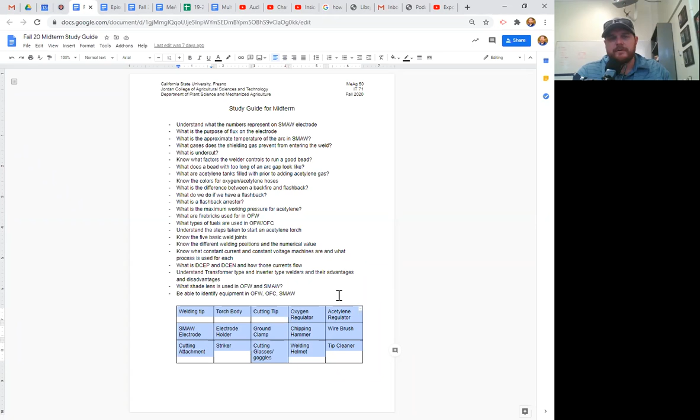It'll be posted by Thursday. You don't necessarily have to take it by Thursday, I'll have it open for a week. You're not going to see your answers and all that kind of stuff, you'll see kind of a score. That way, since people will be taking it at different times — you might take it Thursday, somebody might take it Saturday or Monday of next week, I don't really care when you take it — but because everybody's taking it at different times, you won't see your answers for your questions, but you'll see your results. It'll all be on Canvas. There's not going to be any lockdown browsers, there's not going to be any of that.

We were actually told that we can't use that, or at least that's what I heard from somebody, but in either case I don't use it anyway. The one thing you are going to have on that midterm is a time limit, so you'll have an hour to complete it. So once you start the midterm, you can't just leave it open and try to search for all the answers and that kind of stuff. That being said, I can't stop you from pulling up a PowerPoint that I put up, so that way you have it there and you can look for it.

With the time limit, there should be enough time for you to answer those questions. I've never had anybody go over that time for this. There's no number equations or stuff like that you have to do. It's all pretty straightforward, stuff we've covered in the PowerPoints. Some of the things like the tools and stuff is what we've seen in the lab, stuff like we have here.

I'm not going to stop you if you have that. I have no way of telling, but I'm not telling you to not do it, and I'm not telling you to do it either. It's up to you. The best thing for you...

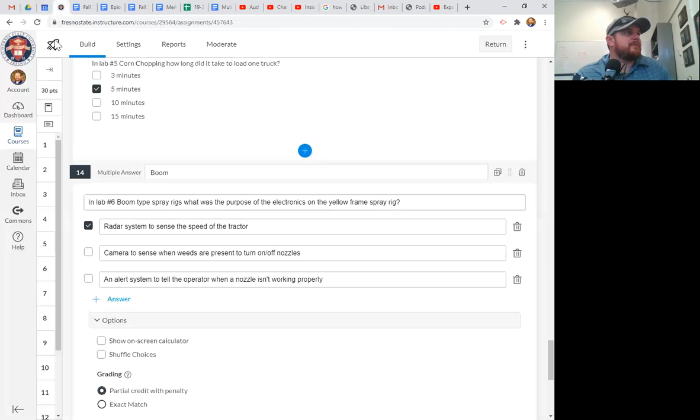Maybe if I pulled up this thing. Oh, did I save that? I don't know if I saved that. If you just look through these things, if you look through Canvas, can you guys see Canvas? Can you see my Canvas page? Is it sharing that screen? Or do you still see the... Yeah, it's sharing. Yeah, we see it. I don't know how this works sometimes.

I don't think the introduction, we don't really have anything there. There's probably going to be some equipment questions in there, like safety questions. I think I kind of put that in that syllabus. So if you go through the personal protective equipment PowerPoint, that stuff's going to be there. If you really look, take this study guide, there's questions on the study guide, but you don't have to answer the questions. They're just more kind of questions so that you know how to answer them. But if you look at those questions and find the answers in these things, I don't think there's anything in that one. The PowerPoints are probably the biggest thing for you to look at.

And just make sure you guys know the tools, welding joints and positions, knowing those things, knowing the number classifications on the electrodes. So like a 6011, a 7018, I may throw in a different rod that we haven't used, and that's okay. But understanding, for instance, if it's a 4-digit number, what are the first two digits on a welding rod? What do they represent? Do you guys know? Do you remember?

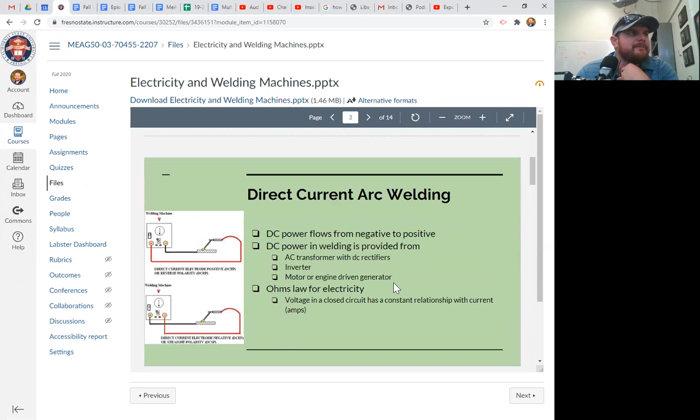Do we remember that? Is it from positive to negative? So electricity, okay, you guys can see this right here, right? Electricity is going to flow. Let me see, where is it at here? Did I skip it? I did skip it. I don't want to tell you the wrong thing because I could screw it up right now. Electricity flows from negative to positive. And I know I have that in here somewhere. You see how I'm even having trouble trying to find it?

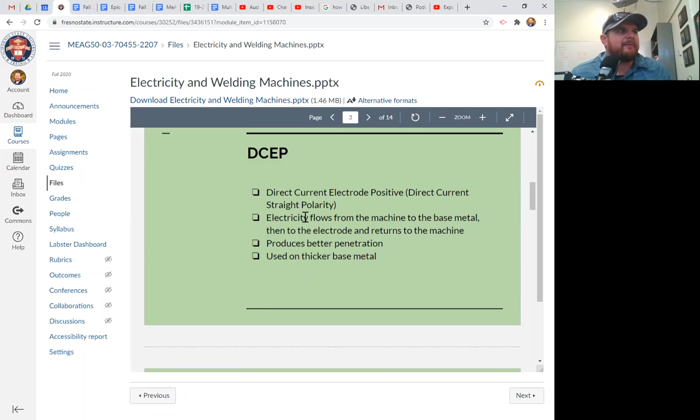Oh, right here. I'm looking right at it. Electricity, okay, that's not what it is, but it's always going to flow from negative to positive. No matter what, it's flowing from negative to positive in a system. And you can see it in this picture right here. This is an example of DC electrode positive. So it's always going to flow from negative to positive. It doesn't matter how I hook up my electrodes from one to the other.

If I were to swap this over and go to DC electrode negative, okay, notice how the power is still flowing. It goes from negative and it flows into positive. Okay, whatever piece of equipment I have and the order that those things are going in, whether it's going negative to the electrode and then to the ground clamp, or whether it's going negative to your ground clamp and then into your electrode, the power is not switching.

Okay, so that's kind of an important thing because some people tend to mess that up and they think on a DC electrode positive, it might be flowing in this direction. On the negative, it's flowing in the opposite direction. We flop the way it's going, and that's not how it works. Okay, electricity is always going to flow from negative to positive. It just happens to do with where in line do we connect our electrode and our ground clamp.

And understand the difference between those. Like, what's the advantage of DC electrode positive? What's the disadvantage of it? Vice versa with the electrode negative. What are the advantages? What are the disadvantages? Okay, I'll let you guys kind of look that stuff up, but that's all in here. But this slide right here, or this PowerPoint, this is typically where people kind of get screwed up because there are a lot of details.

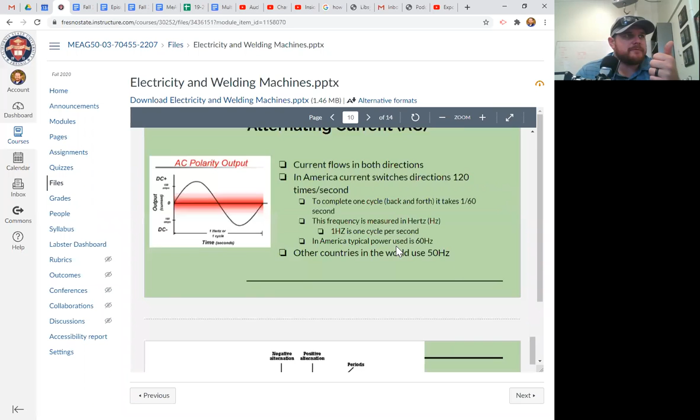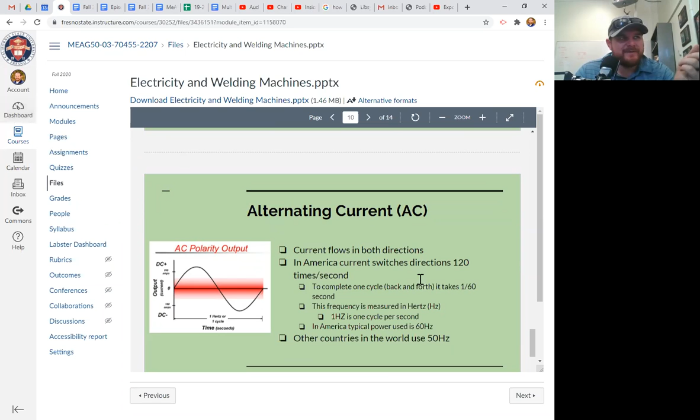Know what an inverter machine is. We talked about it, I think it's right here. I'm probably not going to test you too much on this stuff, on the AC waves and stuff like that. I know we talked about it. We'll kind of talk a little bit more about it as we get into TIG welding because it becomes a little bit more imperative. If you've had me for MEAG 5, you probably have already kind of dealt with some of this stuff when we deal with motors and controls. MEAG 5, MEAG 1, if you have me right now for MEAG 1, we're going to jump into motors, controls, and we'll talk a little bit more about sine waves and stuff. But I'm not going to really, I don't think I'm going to test you on that.

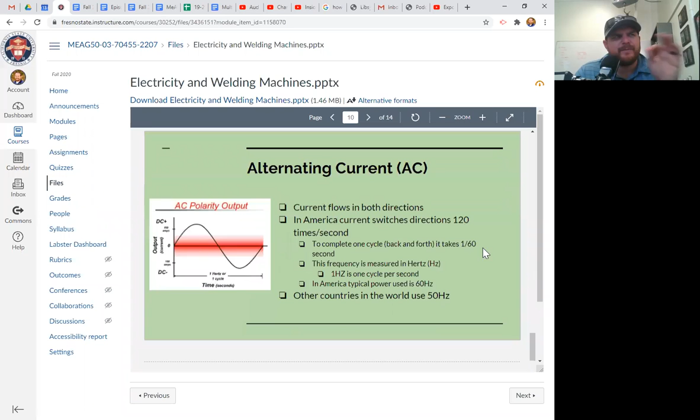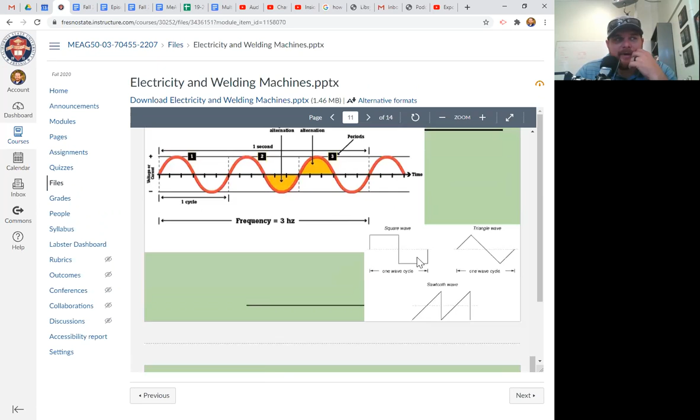Just understand that AC current is both DC positive and negative combined together. And AC power is what we have when you plug into your homes. But how we transfer that power is typically going to be one of two ways: an inverter machine or a transformer type. Inverter types are going to use computer circuitry to kind of modify that electrical current. Those ones are going to be more expensive, but they're going to be lightweight. So you can kind of carry those things around. They're a little bit more portable.

Newer machines, a lot of them are inverter types. Older machines, but we still have machines that are still being produced that are transformer types. And transformer types are going to use a transformer to basically change that power. And they also use a rectifier to change it from AC to DC. You don't need to worry about that. But understand that it's a transformer, it's going to basically step down that power or step it up, however it's hooked up. They're going to be heavy, though. Transformers are heavy. Those machines, you're not going to be moving those things around very much. A good example is we call these tombstone welders.

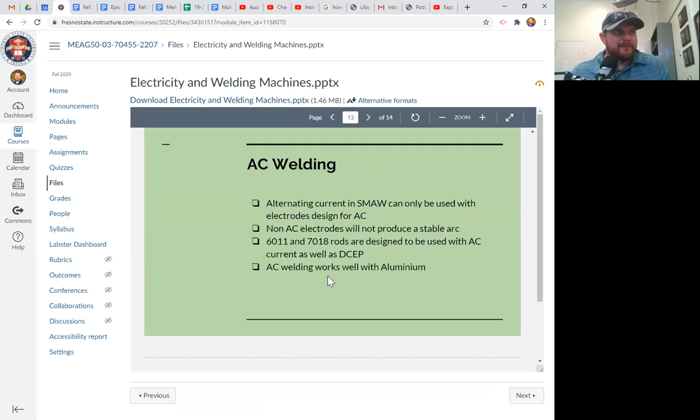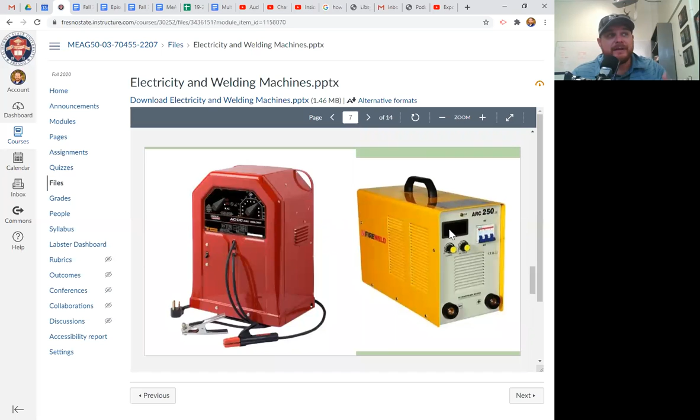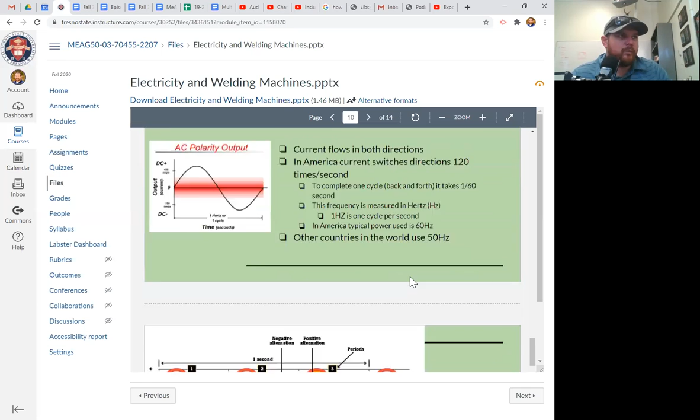Transformer types are cheaper, but they're heavier, so they don't have that portability. This PowerPoint goes through what advantages those things have and what disadvantages they have. Look at those things, make sure you study that stuff, make sure you go through that.

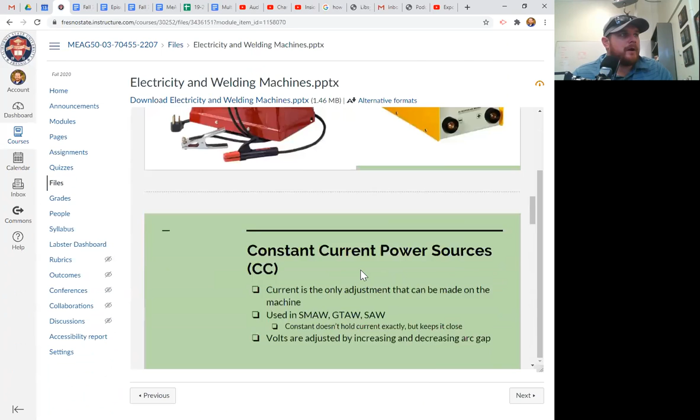The other thing I kind of skipped over: constant current machines versus constant voltage machines. When we're doing shielded metal arc welding with the stick, we're using a constant current machine, meaning we set our amps up and adjust those things to a certain amperage. As we're welding, our arc gap can affect that amperage slightly, but that machine wants to maintain as close as it can to the amperage you set. So the higher you go, the more heat you're going to produce, and the more burn you're going to get inside - more penetration in that weld.

With a constant voltage machine - we haven't really done this yet - a MIG welder or GMAW, gas metal arc welding, that's going to be a constant voltage machine. So on those machines, we set the voltage up and it's going to maintain the voltage. We're not really adjusting that arc or amperage on those things. There are things we do that we can adjust that with, but we're not really messing with it.

One thing about Ohm's law - I think a lot of you've had me and we've talked about this a little bit because we're starting to get into electrical in MEAG 1 if you have it this semester. Ohm's law states that as voltage increases, amperage is going to decrease. They're like inversely affected by each other. So just because we have a constant current machine doesn't mean we're not messing with the voltage as well - as we adjust one, we adjust the other.

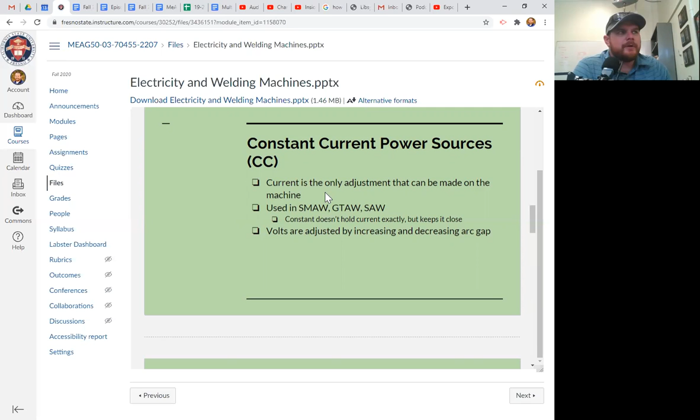Just understand that a constant current machine, we use it for shielded metal arc welding. We use it for GTAW, that's TIG welding. And we also use it for SAW welding, that's submerged arc welding - the underwater welding is what we use those in. That's going to be important. I'm definitely going to ask you a question on that.

Constant voltage is going to be done on GMAW, that's MIG welding, flux core arc welding - that's a kind of MIG welding. And then we also use that on submerged arc welding as well, so the underwater welding, we use it on both of those.

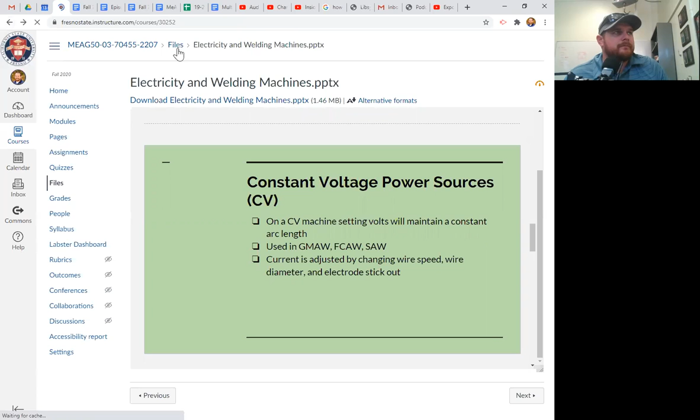And get out of here. Where else are we at? We did that one.

The welding evaluation, that was a PowerPoint, right? I forget what's in this one. Oh, I think this is the one. Come on, pull up. Oh, that was an activity. I thought we had one.

Oh, this one's oxyfuel - the oxyfuel welding PowerPoint. Okay, there's going to be quite a few things on there. Probably some of the important things to note with oxyfuel welding.

Understand the color of hoses, right? Red hoses, green hoses, what equipment that connects to. Understand how much we open valves up on each of those, the oxygen and the acetylene. Oxygen, right, we open all the way. Acetylene is a quarter to a half a turn, but no more than one full turn.

On the test, when I ask you that question, I'm not going to say quarter, half, one turn - I'm not going to give you all three of those as options. I'm going to give you probably one of those, and it's going to be the right answer, and the other ones are going to be so far off that it's not even going to be close. You should be able to do that.

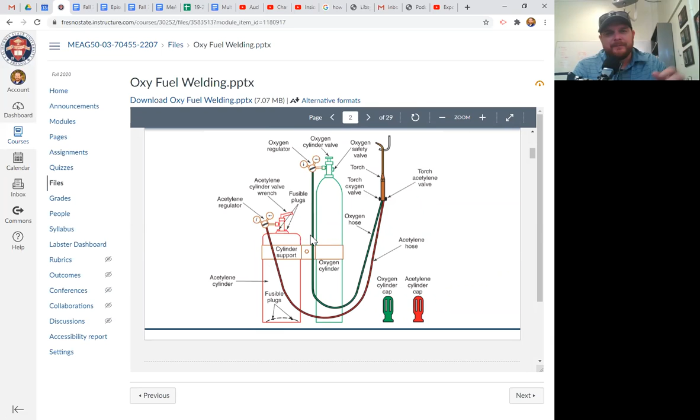I don't want to trip you up, but sometimes on these acetylene tanks we've got to turn them on and we might just crack it, letting some acetylene through. But as you start welding or cutting, it'll drain what's in that line, and it's not open enough to maintain that neutral flame as you're working. So you've got to open that tank up a little bit more. That's why we say quarter to half typically, but sometimes you have to open it up more. The biggest idea is just being able to shut it off real quick.

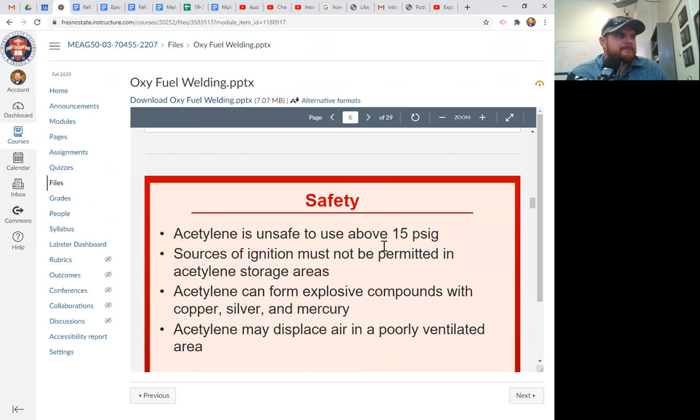Okay, this one's important. Words matter, make sure you read carefully. The maximum PSI that we want to set an acetylene regulator to is 15 PSI. That's the maximum pressure. The working pressure that we've typically been setting on our torch, does anybody remember what pressure that is? Hint, it's not 15 PSI, it's 5 PSI. So you may have a question asking what's the maximum PSI we can set an acetylene regulator to, and you may have 5 as an option, but that's not the answer. The answer is 15. That sometimes trips people up when they don't read the words carefully.

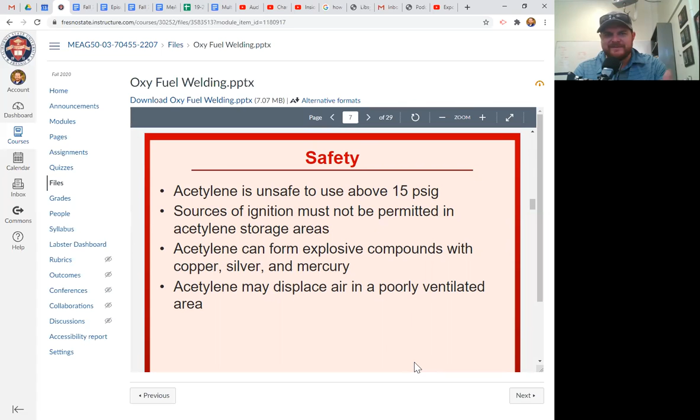You can almost have the same thing in reverse. It might say, what's our working pressure set up for acetylene? That answer should be 5. You're not going to put 15 on that, if you do, it's wrong. So just watch out for that stuff, make sure you don't make that mistake, because words do matter. Sometimes people look over it and ask me, well, I got this one right. And I'm like, no you didn't, because this one word changes that stuff.

We never want to go above 15 PSI because at 30 PSI, acetylene will explode. So we don't want to get anywhere near that. That's why 15 is set as the maximum.

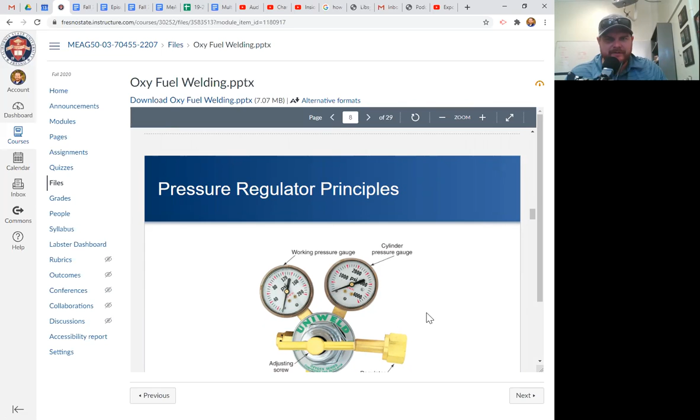On these regulators, do I have an example of it? I don't think I have an example of the regulator. This is an oxygen one, but on the acetylene one, your hose pressure is always going to be here, and your cylinder pressure is going to be here. That's true of an acetylene tank as well. It'll have a big red line right through after that 15 PSI. That's a good indication that you should not redline it, because you could cause an explosion.

The one thing with all the hoses and different things, not only do we talk about the colors, we use red for the fuels, typically acetylene is what we use. But the oxygen hoses have a standard thread, so think lefty loosey, righty tighty, that's true of those. That is not true of acetylene regulators or the hoses that attach to them. Those are what we call left-handed threads, so you go to the left to tighten it. They do that so you do not mix up your acetylene and oxygen hoses.

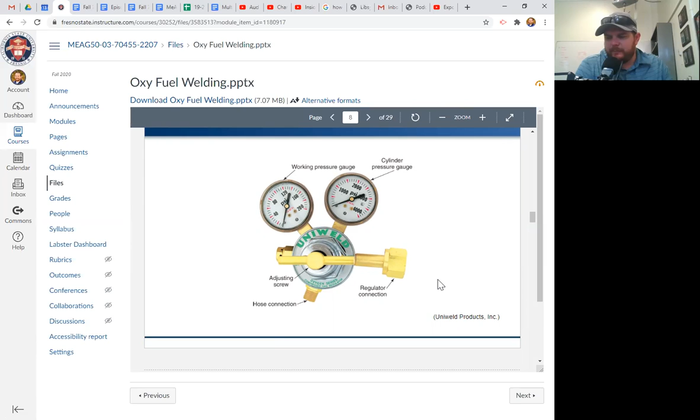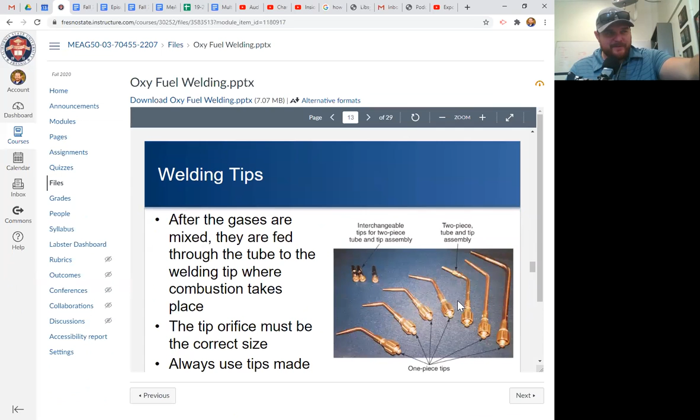You cannot mix them up because the threads are completely opposite, it will not thread on. Let me find a picture that's got the acetylene stuff. The tips, the cutting tips and welding tips, those are not left-handed threads. It's only on the hoses and the regulators. I know I have an example of this in here.

Those notches indicate left-handed threads, so that's for your fuel or acetylene. The oxygen ones do not have those notches on them, so you can do a real quick visual cue.

Acetylene hoses are going to be red and have notches, and they're going to be left-handed threads. Oxygen is going to be standard right-handed threads, meaning you go to the right to tighten it, and they're going to have green hoses. So: right-handed threads, green hoses, and no notches. They're just a smooth thing where it's going to connect on the nut somewhere.

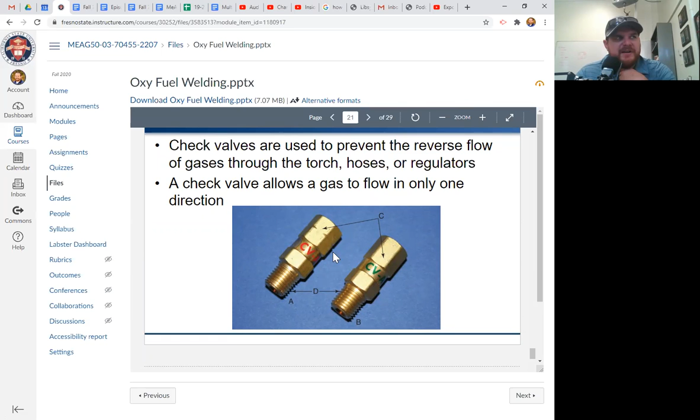While we're on the issue of check valves, there's going to be a trick question, but you'll be able to get this right. This is a check valve. It works the same way whether dealing with water or gas. If we have our supply gas coming in, it's going to go into this valve, push open this little spring, overcome the pressure the spring is pushing on it, and allow gas to flow past that and through the line.

The way a check valve works is it prevents something from coming back. If I had more pressure this way than the other way, the spring is going to force this thing closed and stuff is not going to go past this. It's one way we prevent a flashback from occurring.

A flashback is when we have a pop, our flame burning up inside of that torch. You'll hear a loud whistling noise, and that means you have a flame burning on the inside. If we don't have check valves and flashback arresters to stop these things, that fire could travel back into the tank and explode it. But there's all sorts of safety guards in place to prevent that from happening. Check valves are one of those things; they just prevent the flow of gas in the reverse direction.

So the question is, how much do we open these check valves? Think about an acetylene tank or an oxygen tank. Do we go a quarter to half a turn? Do we do a full turn? Do we open them up all the way? How much do we open these check valves? Do you guys know?

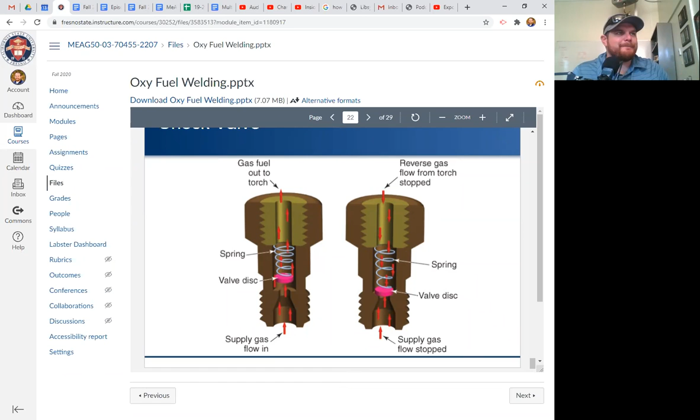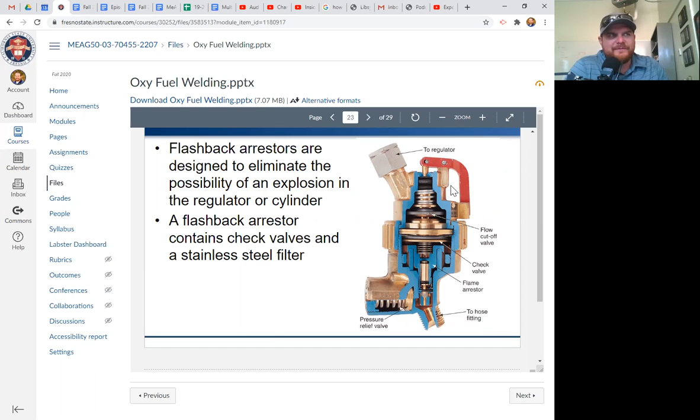Flashback arresters typically have check valves built into them, but they're actually a little more sensitive to the reverse flow of gas, and they'll shut it off quicker. That way, before the flame actually gets into it, there are all sorts of different sensors and other components on the inside that prevent it from going back. It's not as simple as a check valve, but a check valve is just one way we prevent the reverse flow of the gas.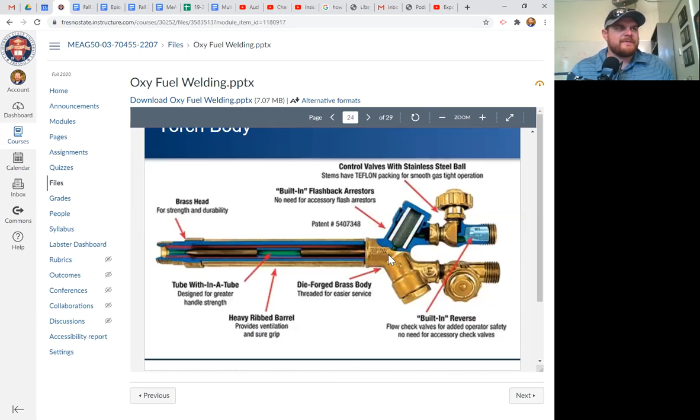I'm not worried too much about the torch body. The rods - the classifications on oxy fuel welding rods - I know we didn't cover this, but next week I'm going to show you some of that stuff. The numbers, typically we're going to have RG; this one's going to be a 45, meaning it's 45,000 pounds of tensile strength.

We don't have any flux coating or anything like that on these things, so they're a little bit more basic. A 60 is 60,000 pounds of tensile strength.

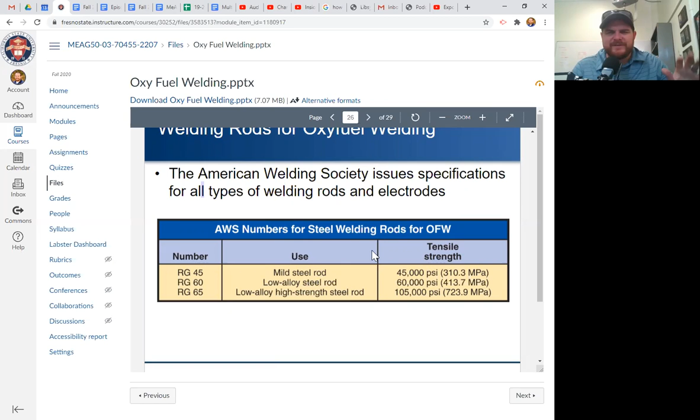Again, I don't know why AWS, the American Welding Society, did this, but the RG65 is at 105,000 PSI. I don't know why they jumped these numbers up, but there's only 3 of them you have to remember. Know that if it's an RG45, it's 45,000. The 60 is 60,000, much like a 6011 rod. And the 65 is 105,000. So those are the 3 options. There are other ones, but those are the only ones I'm really worried about you knowing and understanding.

Sometimes you do have fluxes that we put in there if we're welding things like copper, silver, aluminum. We can do that with oxy fuel welding. But know what those things are.

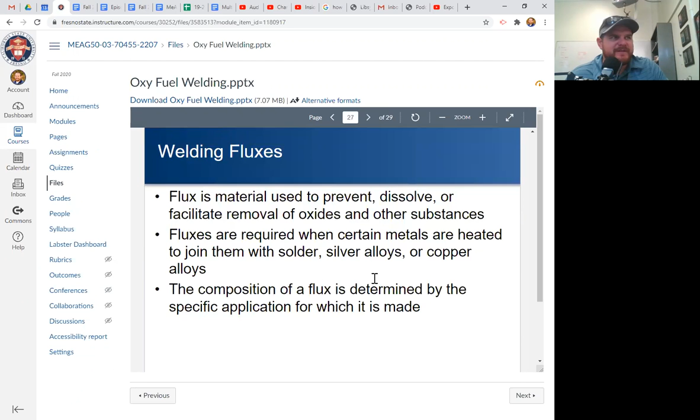It's pretty much the same stuff. We might dip it in there. It might have a coating around the rod.

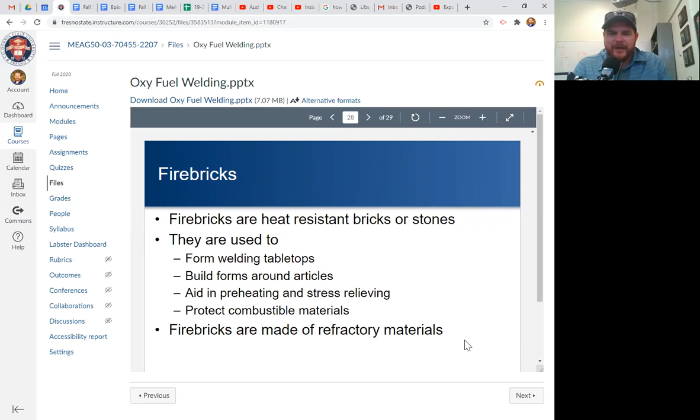The fire bricks that we're actually welding on, I think I've shown you guys those fire bricks. They're basically heat resistant bricks that we are laying down, and it's there to help absorb some of that heat, to keep that heat up into the welding joint that we're trying to complete there. But they're not just your regular standard red bricks. They have to be fire bricks.

The only common place that I have seen these fire bricks is at Lowe's. I haven't seen them at Home Depot. But if you look up fire brick, they're there. You can get them. Same thing you would put if you had like a fireplace and you want to have bricks in the fireplace. It's the same type of material there.

The heat isn't going to affect that. They're going to absorb that. Has anybody ever put a flame, not like a lighter flame, but like a torch flame or something like that, on a red brick? Has anybody ever done that before, purposely or accidentally?

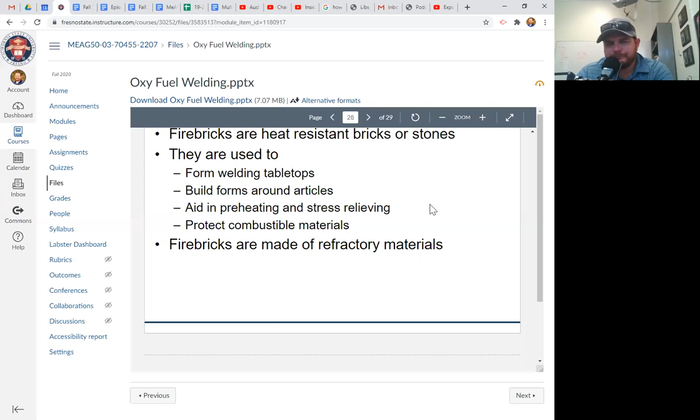What happens with the brick, and the concrete's really the same way actually, it reacts the same way that a red brick does. It will actually start to eat away at that stuff. It'll pop and chips will break out either from your concrete or your red brick. So it's important that you don't just use a red brick you had maybe around a house for a planter bed or something like that. If you're trying to weld, you've got to make sure you get that fire brick that's going to withstand that heat. Otherwise the brick is just going to fall apart and crumble. I don't know exactly what's happening on the inside, but just understand that those things are there.

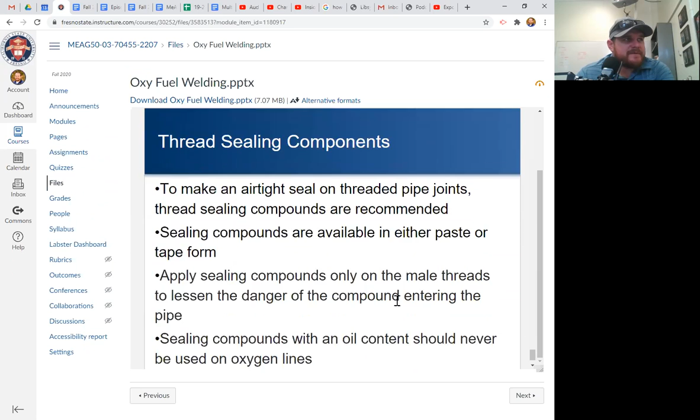I'm not really worried about the sealing compounds. I don't think I'm going to test you guys on that.

What's the other one? I don't think I did a PowerPoint for that, just a lab. There is one. I think in this one we had the welding joints and positions, and we've done a lot of evaluation on welds. Make sure you understand that.

The one thing I want to make sure I reiterate with you on the 6011 rod - what did I do here, oh my gosh, let me go forward. The 6011 rod, typically what we want to set that at is 100 on the amps. The 7018, we typically are around like 120, 125. Make sure you know those standards.

That's not set in stone. I'm going to ask that question, like, what do we set our amps up to? So I'm just telling you now, so that way 6011 is 100, 7018 is going to be 125. I'm going to give you a range. I'm not going to give you 6011 as we need to set it at 99, 100, 101, 102 - I'm not going to be that particular, because you could theoretically do any one of those. You can adjust these things up and down.

What you don't want to do is run a 6011 rod at 125 on the amps, because it's just going to burn way too hot. Things are not going to come out well. Likewise, if you turn a 7018 down, especially on a flat position joint, if you go down to 100, it's not going to work very well.

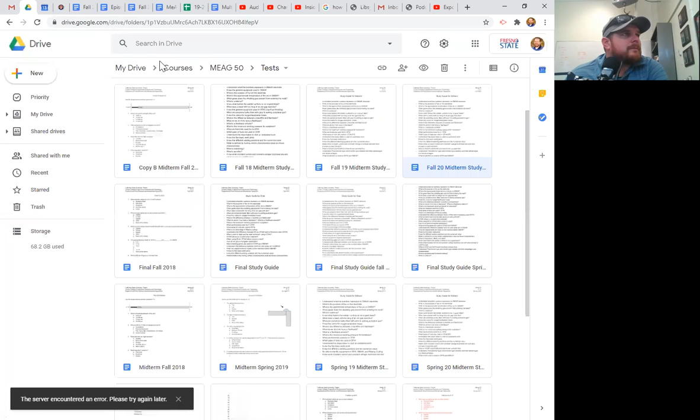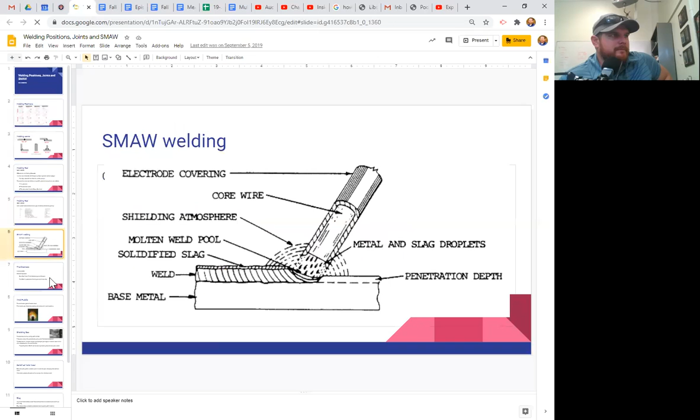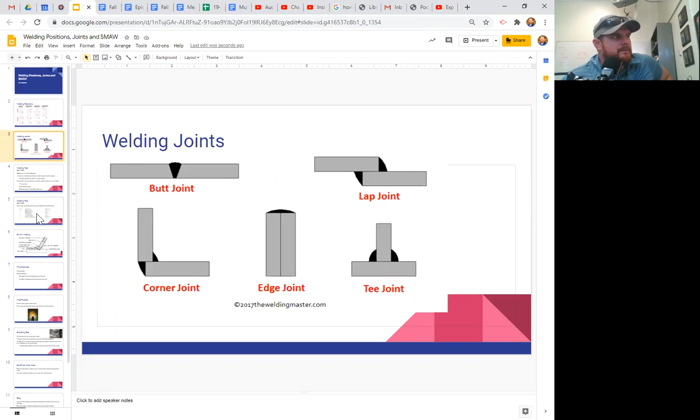Maybe I'm looking at the wrong one. Maybe I need to make sure I look at this thing. I feel like I'm missing a PowerPoint here. I do not see this PowerPoint, and if not, that might be an issue. Maybe we haven't gone over it. Sorry, I'm just trying to find this thing, SMAW here. No, that's the one we were just looking at, right? No, did we not do this one? We did do this one, didn't we? Did I post the wrong PowerPoint up, maybe? I might have. Somebody help me out, did we go through this PowerPoint in one of my videos? I can't remember, I don't recall seeing it. I'm gonna have to look at that. I could have sworn we done this, but maybe I overlooked it. Maybe we didn't do this one. Maybe I just did the demonstration instead of it. We did talk about joints though. I'm pretty sure I did this one. Maybe I just posted the wrong one, or maybe it's not posted at all. Let me try to find this right now, that way I can help you guys out a little bit. Fire safety, I don't know. I have a 5th tab there.

That's the PowerPoint one, this is how to set that stuff up, that's our lab. Okay, well, it's in week 4. I just, Week 4? Okay. Welding joints and positions, okay. Maybe I didn't post it. Maybe it's in the page here. Yeah, okay, so I think what I did here, I think I posted the wrong PowerPoint up.

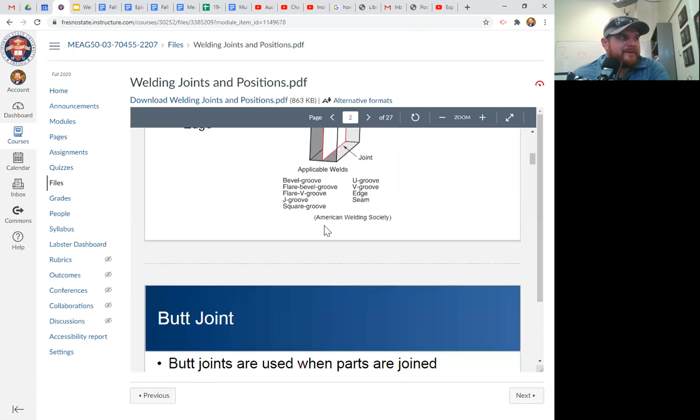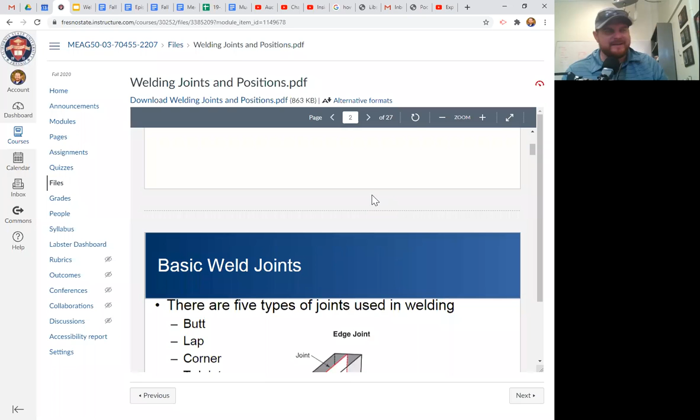They kind of have similar information. So this welding joints and positions PowerPoint that I pulled up, the video one goes over the PowerPoint, and then I just posted the wrong video that dealt with that. There's some stuff we didn't go over in this one. I didn't do a video on this one. So if you watch the video, you have that, I will post right now, I'll post this in there. I'll leave this PowerPoint just so you guys have information, but we didn't do a thing on here. And this is really not what we're going to get tested on, it's really this one, and I will post that as soon as we get out of here. So this is the one that we went over in the video.

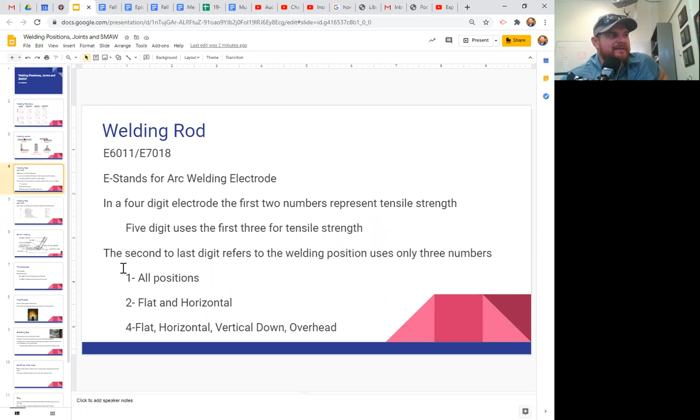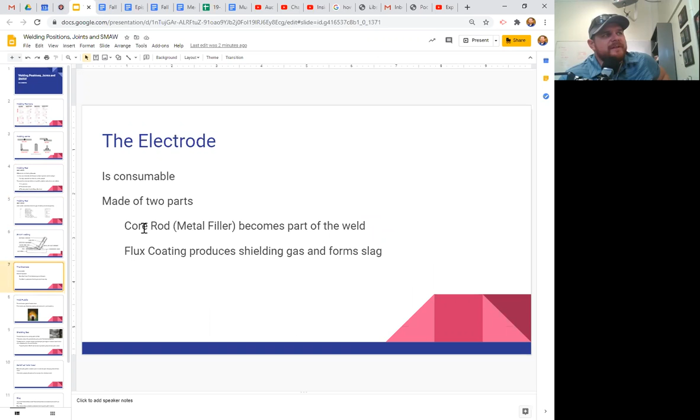It's a little bit more simplified, a little bit easier. This is the one that has your welding positions and stuff in them, right? So we kind of talked about that kind of stuff. These are the coatings, I don't want you to memorize this, I don't want you to memorize what polarity things run in, that is not something I want you to deal with. But do understand that at 1, 2, and 4, it's all positions flat, horizontal, right? We can look at those things. Yeah, I thought I was missing something, but I could have sworn we did this. Understand the electrode has a core, that's your rod, and then you've got a flux coating on the outside.

We've seen some weld puddles. The gases, this is an important one. Porosity, see these little holes right here? That's porosity that comes in the weld. Could have gases like nitrogen, hydrogen, or oxygen. Those are the 3 gases that basically pop up and cause this. These are like little wormholes essentially in that metal, and it makes it weak, because those are holes in there. That metal is not going to be as strong.

We do different things like cleaning up the metal to prevent that. 7018 is what we consider a low hydrogen rod, which kind of prevents hydrogen from getting in there. We keep those in an oven so they don't collect moisture. And then we have that shielding flux that burns and creates that gas cloud, and that gas cloud is what protects it from the outside air, because we have oxygen, nitrogen, and hydrogen that naturally occur in our air.

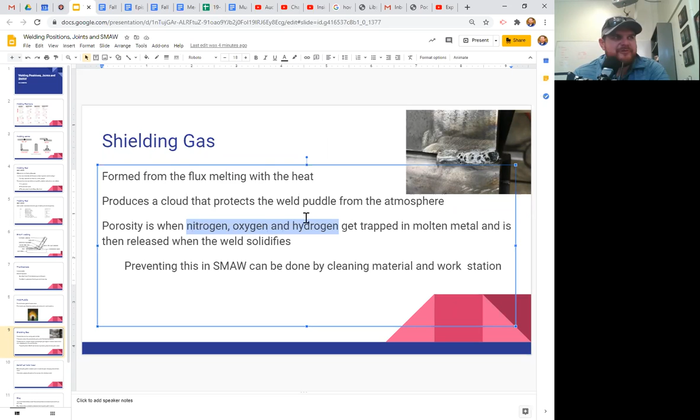That's kind of one of the main things we want to talk about. Understand these three are key to understanding what gases are there. It's not carbon monoxide or carbon dioxide - it's nitrogen, oxygen, hydrogen. Those are the 3 gases we're trying to prevent to avoid that porosity.

Slag is just that stuff that's left over. You guys have seen me chip that slag off. When we're doing shielded metal arc welding, that's just something we've got to do. But that helps float out any impurities that are in that metal.

6011 is a good rod for when you're welding on rusty or painted metal. We still try to clean it up, but sometimes there's micro contaminants in there - could be oil, could be different things. We don't just straight weld over painted pipe or metal, you do have to clean it up, but sometimes in the pores of the metal you don't see it. It's still there. That slag floats that stuff up to the top.

6011 is really great at that. 7018 isn't as good, but they both still do that same thing where any impurities in that metal will float to the top.

Ideally you want a nice shiny metal to help make a weld good, but sometimes you can just weld over it. Mill scale is that stuff on metal that's kind of dullish, kind of gray looking. When we manufacture that metal, it goes through a heat treatment process and stuff floats to the top and those things sit on there. You might see it on metal sometimes - if you've ever bent metal, stuff starts to crack and break off, kind of flake off. It's a real thin layer called mill scale. Some welding rods will burn through that real easy.

Sometimes that stuff can cause porosity, and if we want to do it correctly, we grind it off. A lot of times with shielded metal arc welding we don't do that - we don't waste our time with that. We don't really get a whole lot of porosity.

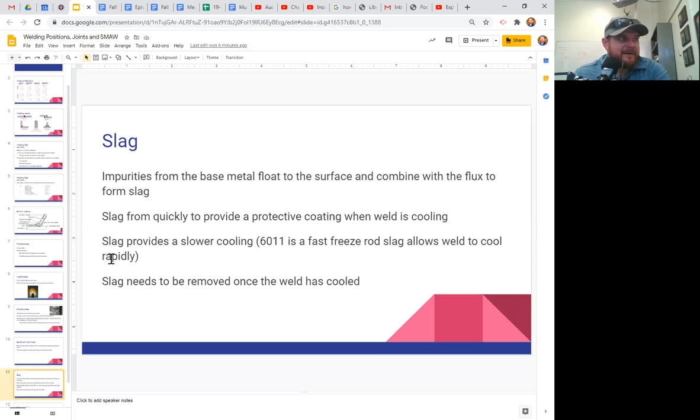If you're doing TIG welding, which we're going to get into in the second half of the semester, that stuff is a completely different animal. There's stuff that won't burn through. You're going to get holes. You're going to get a lot of porosity built up into those things.

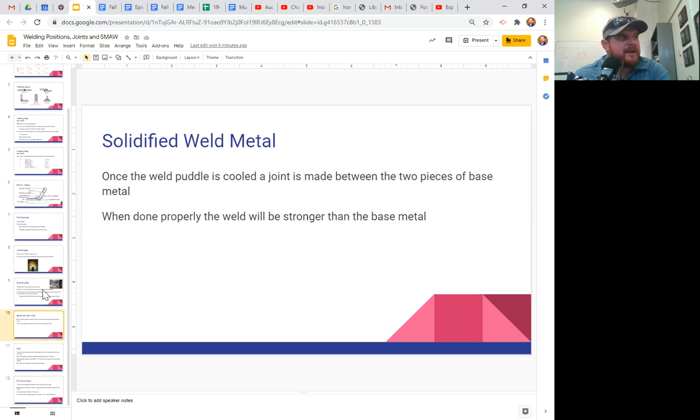We've talked about filling the crater, but I don't think I'm going to test you guys on that at all. I'm going to post this PowerPoint up so we have that. But what other questions do we have? I think we've gone through quite a bit of stuff here. Do you guys have any other questions on this?